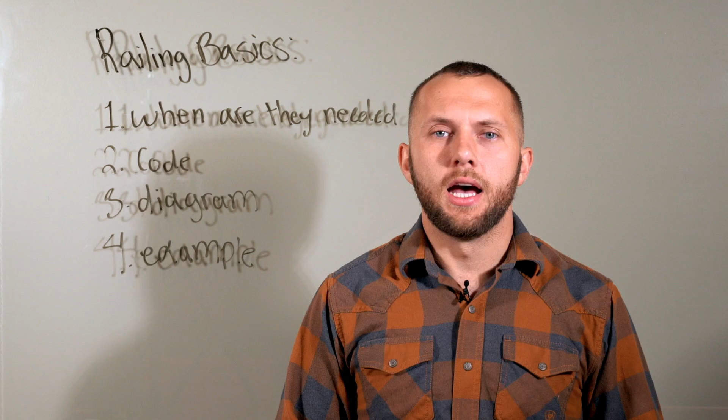All right, I want to talk about the basics of railings. For those that are working at the residential division, 99% of your work is railings. I want to talk about 4 main points. When do we need a railing? Because a lot of times on a job site, even though you're told to do X, Y, and Z, sometimes we miss certain spots where they need a railing.

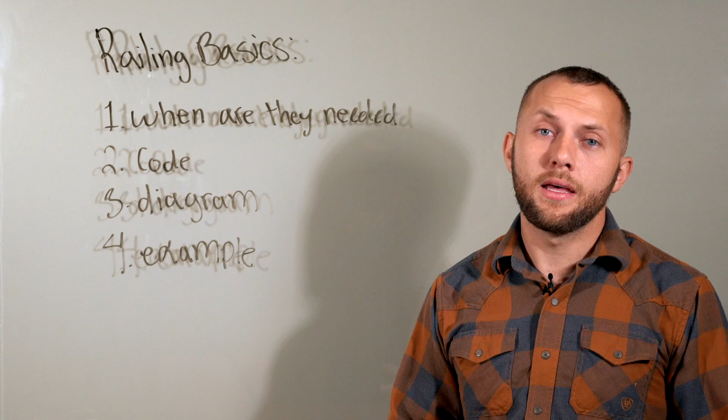Second, what are the codes for railings? This is the most important one because this plays a role in how you build it here in the shop and how you build it on site. 3, we're going to show you a diagram, the basic railing that 99% of our work is. 4, I'll give you 2 examples of our material that we use for the railings.

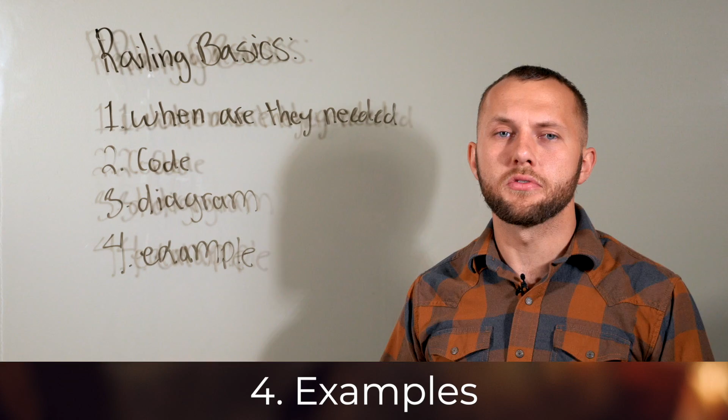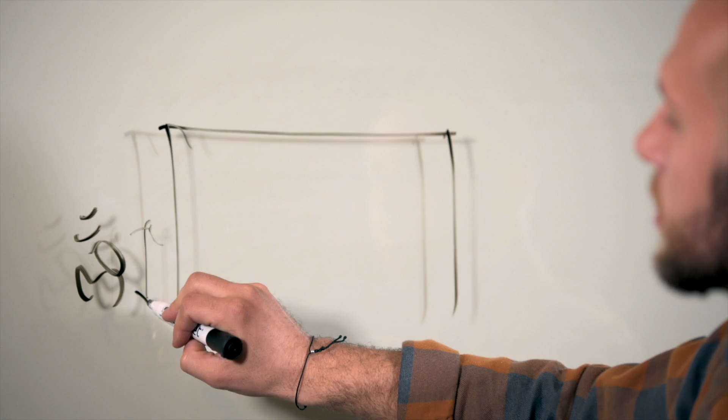Now the question is, when are railings needed? Very basic. 2 reasons a railing is needed. First reason, let's say this is a porch and it's above 30 inches. So anything that is larger than 30 inches off the ground is going to need a railing. So if any adult or child goes on a porch, they don't fall off and break their neck.

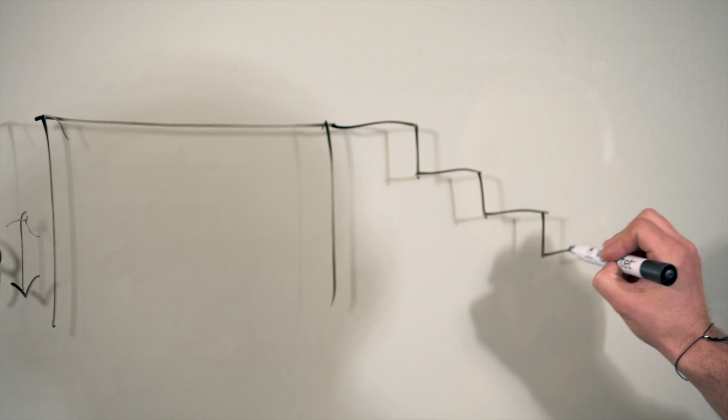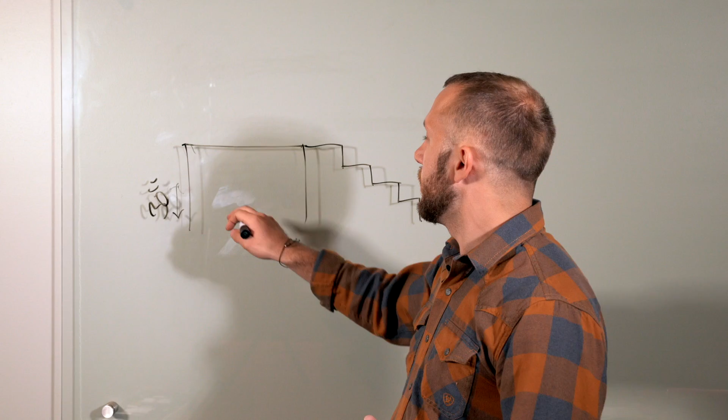Second reason why you need a railing: if you have more than 3 risers, not steps, but risers, because the landing counts as a riser as well. So here we have 1, 2, 3, 4. And anytime you exceed 3 risers, you need a railing, even if the landing on top is less than 30 inches. Why, you might ask? If anybody elderly is going up the stairs, even though the steps are wide, they still need something to be able to hold on to as they're going up.

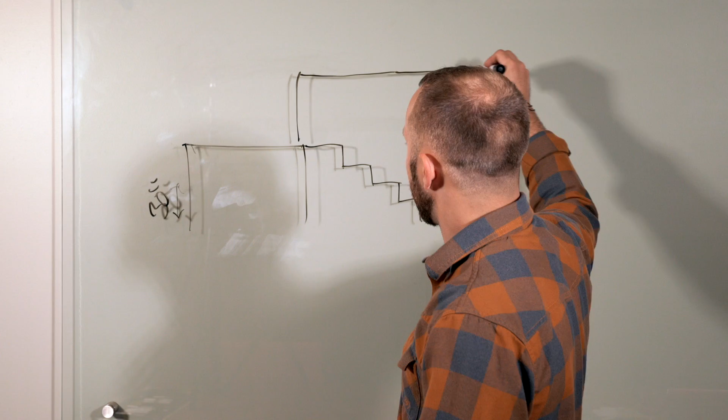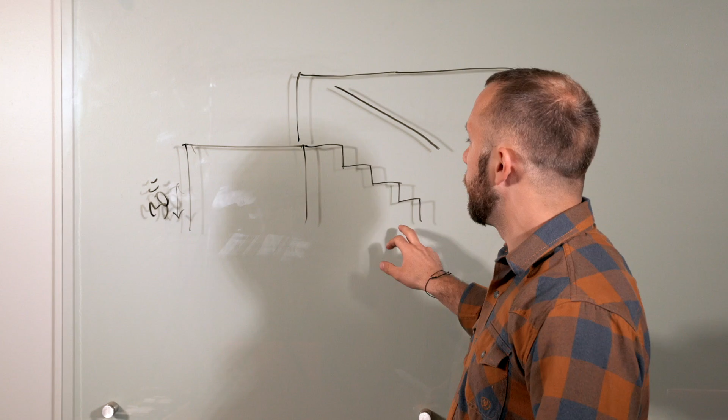In certain instances, we don't always need pickets, but in general, I'm talking about anything above 30 inches above the ground, or anything that's more than 3 risers. Now, let's say there's a wall on the back side, and it's less than 30 inches here. In that case, all we can do is build a wall rail, which you guys should be familiar with. So, anytime anything's above 30 inches, we need a railing. Anytime we have more than 3 risers, we need a railing. And if it's less than 30, but we have more than 3 risers, we can add a wall rail if there's a wall.

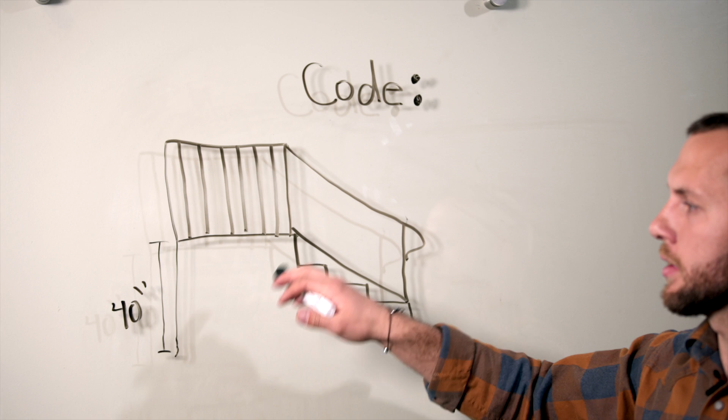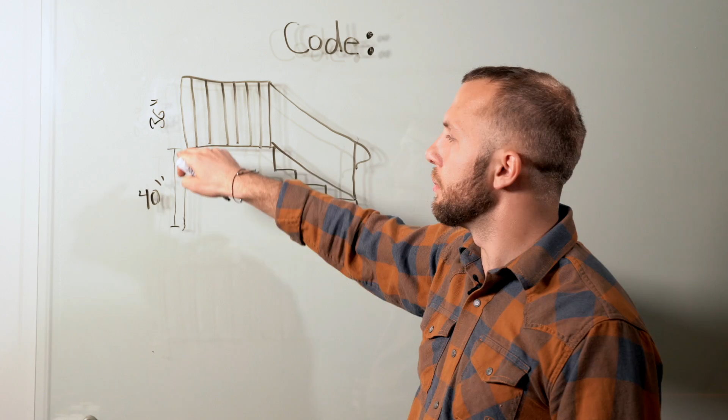A lot of you guys ask me, what is the code for railing? It's very basic. Let's say you have to have a railing on top because it's 40 inches above the ground and you have more than 3 risers. In this case, when you build a railing on the landing, it has to be higher than 36 inches. 36 inches is the minimum from the floor to the top of your railing.

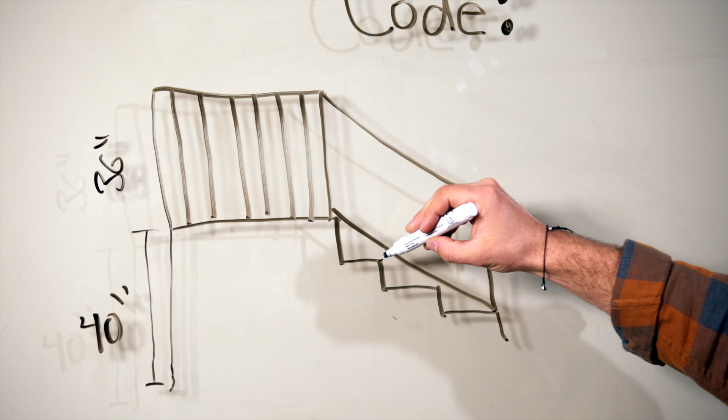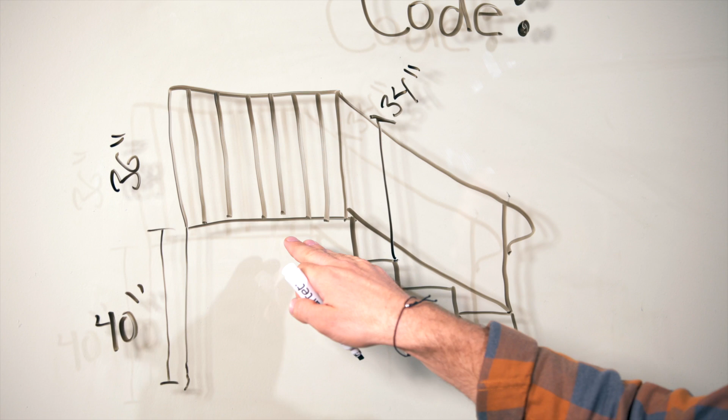Now, the height on the steps, on the treads, from the edge of the step to the top of your railing has to be a minimum of 34 inches. So as you're building these rails, landing has to be minimum 36. On the treads, minimum of 34 inches from the edge of the step going up. So anytime you measure these, double check that you have it level, so that way you don't have it inclined and think you have more or less.

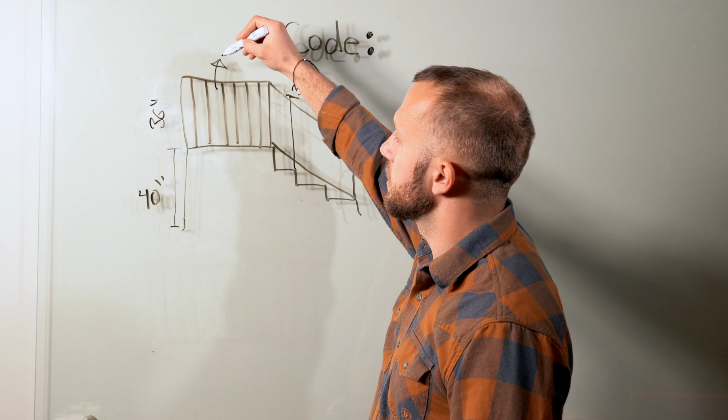Now the biggest rule is also the space between the balusters. The maximum space is 4 inches. In our shop, we try to make it 3 3/4, 3 7/8. Why? So we don't take the risk of ever exceeding that 4 inches. If one single one exceeds 4 inches, the whole railing has to be redone because of that one piece.

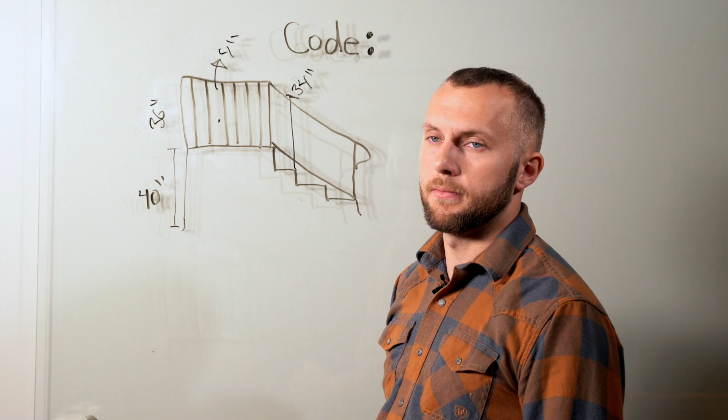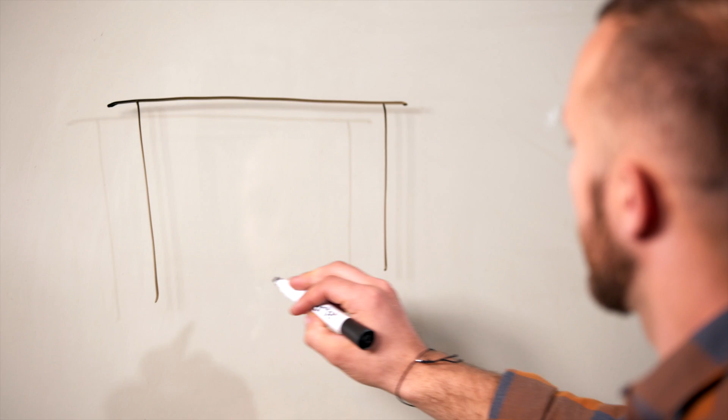The majority of our railings are between 2 columns on a landing. And we have a very basic standard the way we build them. I'm going to draw you the standard, and yes, there are circumstances in which that standard changes. But unless we are told specifically something changes, this is the way we build them. Here's a good example. Here's just a regular rail, top rail, post, channel, without the base plates just yet.

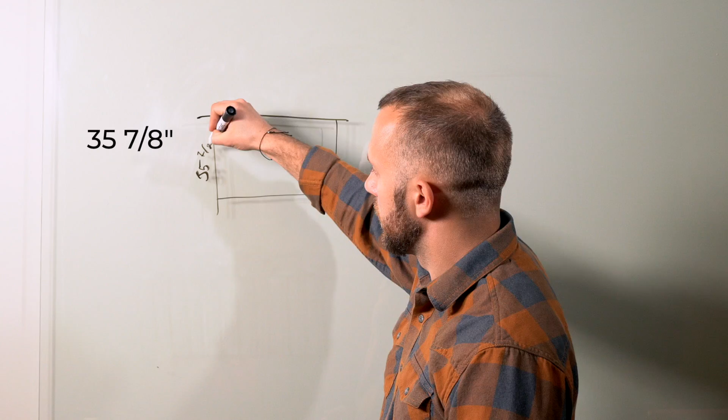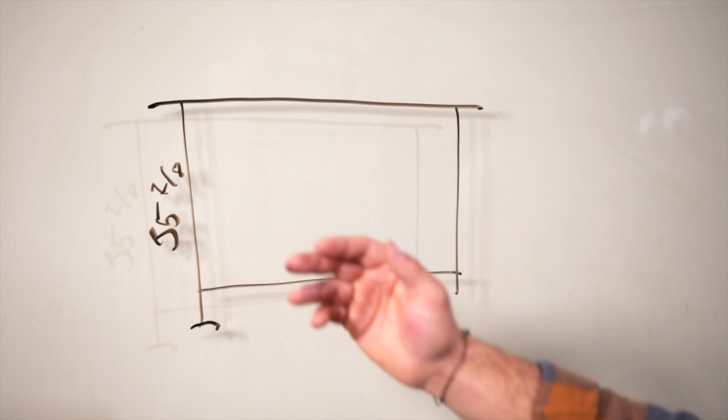We cut the post at 35 7/8. The reason why is whenever we cut a full 20-foot 1.5 inch tubing at 36, the last piece becomes too short to use. So when we say we use a 36-inch post, in reality we mean 35 7/8. Then we have base plates on the bottom, and the thickness of the top rail. So when you account for 35 7/8, a 1/4 inch base plate, and the thickness of the top rail, it exceeds the minimum 36-inch rail.

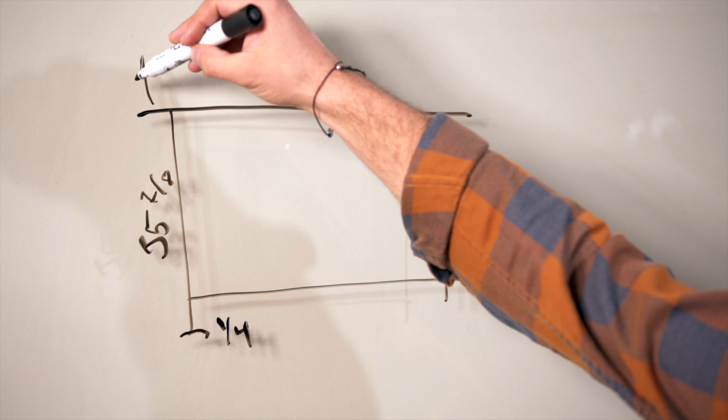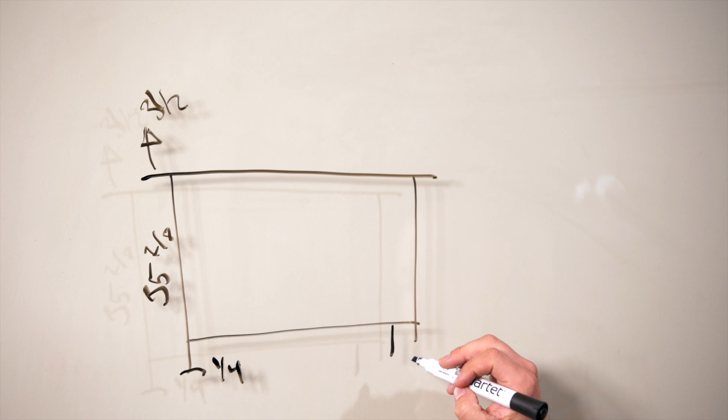The spacing that we use between posts and the edge of the top rail is 3.5. We cannot exceed 4 inches because that's the code, but we try to bring it out as much as we can so it's easier to add that screw to the column. When you measure out your frame in the shop, measure from the channel to the bottom of the 1.5 inch tubing at 2.25, so that when you add your base plate, it comes out to 2.5 inches.

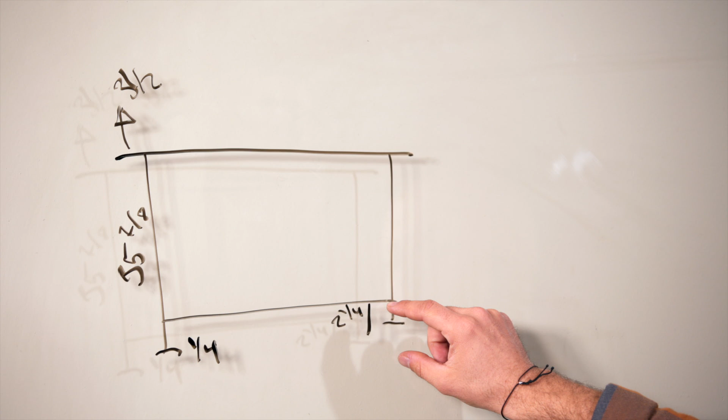So as a recap, 35 7/8 post, we use 1/4 inch base plates. The space between the channel and the bottom of the base plate is 2.5 inches, and the spacing between the post and the edge of the top rail is 3.5.

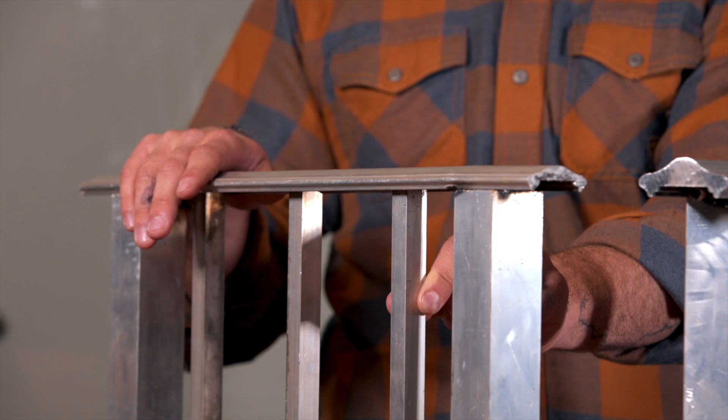So these are our two basic standard railings. As you see, the tops are different, the balusters are different, but the post and channel size are the same. This one is a 2.25 top rail. 99% of the time when we have a 2.25, they're always 3/4 balusters. Some specialty jobs will do a little different. 99% of the time, same with this. Anytime we use a 1.75 inch top rail, we always use 5/8 balusters unless we're told otherwise. So anytime we're building a 1.75 inch, we use 5/8 and a 5/8 punch channel. Anytime we use a 2.25, we use 3/4 balusters and a 3/4 punch channel.